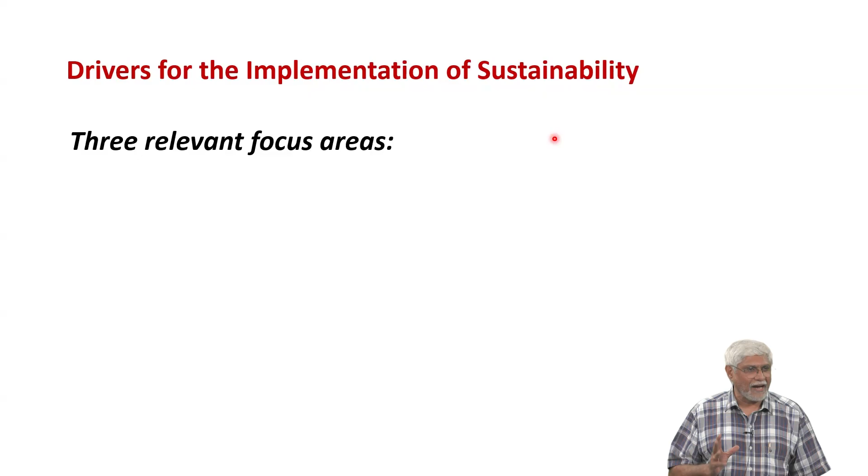Basically, we have to bring in sustainability in three aspects. Generally, what is sustainability? Can someone give me a nice definition? I'll give you my definition, but give me a definition, since everybody likes sustainability and probably you've been told that prefabrication is good for sustainability. Yeah, what is sustainability?

It should be long lasting. Not always, no, but I think it should be long lasting. Environment negatively, okay. Should be eco-friendly, also same thing, no? Eco-friendly and environment. Anything else? Reduction in carbon footprint. Use of minimum resources - raw material consumption should be okay, good.

Should be cost effective, okay. It should be easy to recycle, okay. What else do you think should be in sustainability?

Anybody else? Any architects here? No, no architects. One architect. So architect's point of view, anybody who is architect? Yeah, Vidya. So both of you should tell architect's point of view, what do you think is sustainable?

Minimum energy consumption in the fabrication, in the operation. The operation energy should be low. Good. Climate responsive means what? That it should adapt to climate change. Is that it, or? So it should be, so if it's sustainable, it should be in the climate context, it should also be sustainable. Yeah, very good.

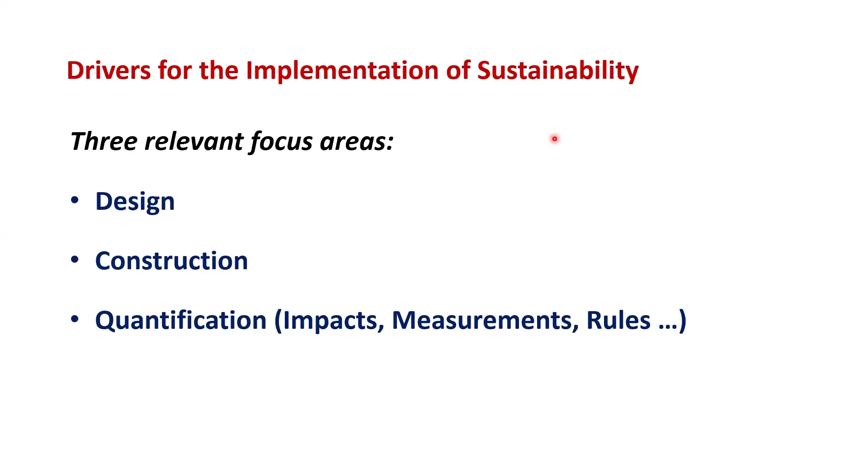Whatever you do, the same thing applies to prefabrication. We cannot jump in at some point and say this is good or this is bad. We have to first start with design, design efficiently, construct efficiently, and quantify whether something is good or not. We have problems of all types, experience on our campus and others with prefabrication. We think it's sustainable, but we've had problems in all these aspects.

Generally, what we say are the advantages and why it is more sustainable: you can construct faster, there will be lower dependence on labor. Now, we might say dependence on labor is good because it is cheaper and gives livelihood, but it also induces a lot of errors, since you depend on skilled or unskilled laborers. So this also has consequences - your factors of safety increase, your tolerances increase, your overheads increase.

Quality is always an issue, like you people said about sustainability. The defects matter, and if we do not look at it, we won't get 50 years, we won't get 100 years - there are buildings collapsing in a few years. So we have to look at better quality, and this is very difficult, because how do you know if something is of good quality or not? Especially in concrete, it's very, very difficult.

We feel quality will be better because the precast elements, the prefabrication, is made in a factory, so it's becoming more of a factory product rather than done at the site. But mostly you will find that something still has to be done at the site. So from all the lectures you've seen, what are things that you have to do at site anyway, even if the element is prefabricated?

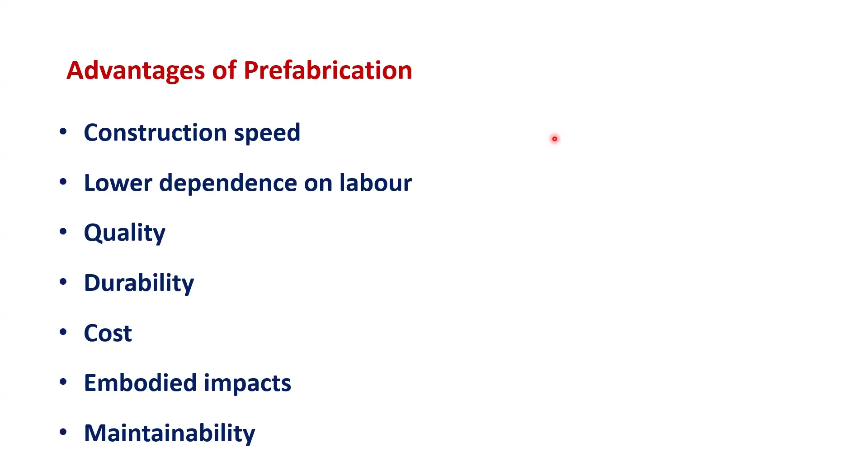So a lot in buildings - that is part of the main scope of this course.

Lot of options are there. This is from 2017, one of the big buildings by a major contractor called Shapoorji Pallonji.

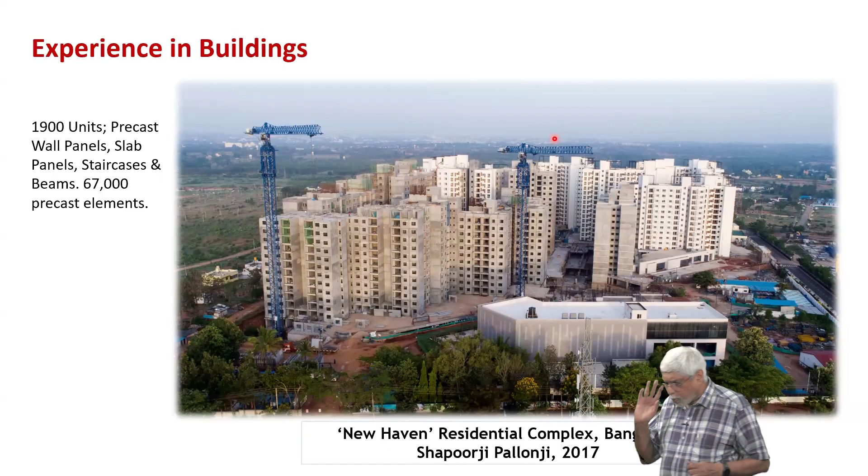So they have used, this is a project where 1,900 units, precast walls, panels, slabs, staircases, beams, 67,000 precast elements. So one thing we start noticing when we look at these success stories is the project has to be big, it has to have a lot of space. Especially in a country like India, and probably many other countries, this is going to be the factor that tells us if it's going to be successful or not. You have to have a large project.

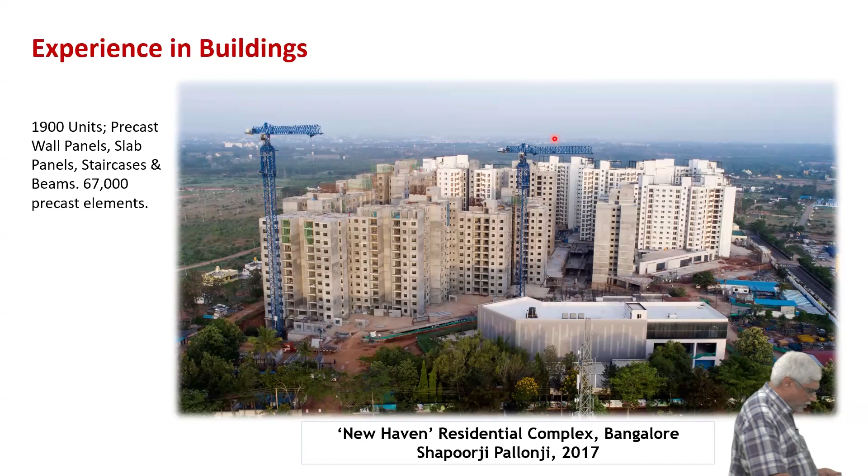Similarly, these are projects for lower middle income groups for CIDCO in Mumbai. And again, a lot of elements. Here you can see some pods also, right in the middle. So these are not only 1 or 2 dimensional, but now you have 3 dimensional elements. These are toilet pods, or these could be smaller elements.

Then you have walls which are very long, about 15 meters or something like that. And finally, if it's done, it looks no different from any other building. The interiors also are very nice. Here you cannot see it very well, but all this is prefabricated. There is even a window sill of granite, and then you have this element which nicely integrates the window and so on. So you can have elements that can be prefabricated, picked up, and put in place.

You might have noticed in some hotels, if you stayed in large hotels like Ibis, or I don't know if Ginger also, the toilet is completely prefabricated. It will usually be polymer, it will look plastic, if you hit it, it sounds plastic. And everything is integrated. When it comes into the building, the sanitary ware is all fitted. You have your WC there, your sink there, lamps, everything is put in. They just fix it, and then you need 3 connections out: water, sewage, and electricity. That is the power of prefabrication. But you have to have a lot of volume. So this is very, very important.

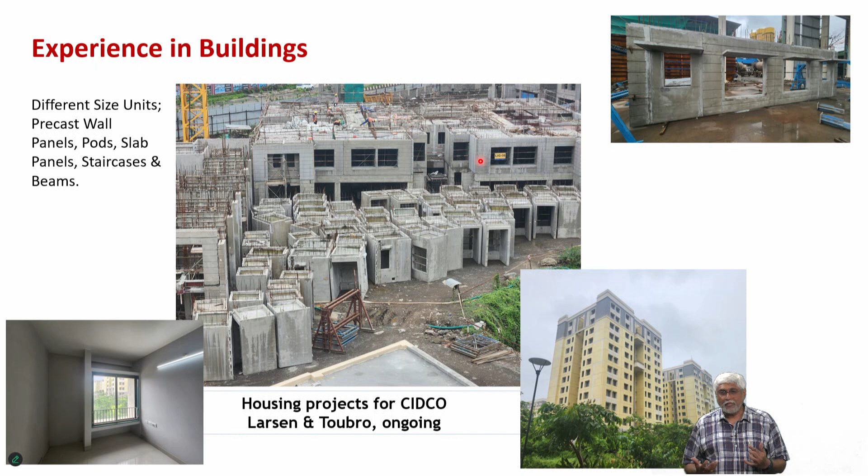So what I think, from what I've discussed today, there are certain things we have to focus on in India. It is not the structural design, that can be done, it's like what we design always for. First of all, if you want to do precast, I think it has to be a large project. Talking to people, it looks like it has to be at least 4 million square feet.

So that means it's a 1,000 crore project. You cannot decide my house should be prefabricated and start it, it won't work. We have burnt our fingers trying to do one small lab. It will take a lot of time, it's not going to happen.

Why do we need such a large project? Number of repetitions will bring down cost. Otherwise, it's a huge investment. What else?

Reuse of molds - how many times do you think we can reuse a metal mold? Has somebody talked to you about it, or should you know? It will be only about 70 to 100 max. Steel molds, only about 70 to 100 max if you're doing this.

So we think it will be a lot, at least this is what they told me at the site. I don't know who told you 1,500 times. Don't believe all these handbooks, they are written by people who don't know anything. Yeah, they are recording this, I don't know if I should say all this. Go to site, talk to people from the site, talk to people from the site.

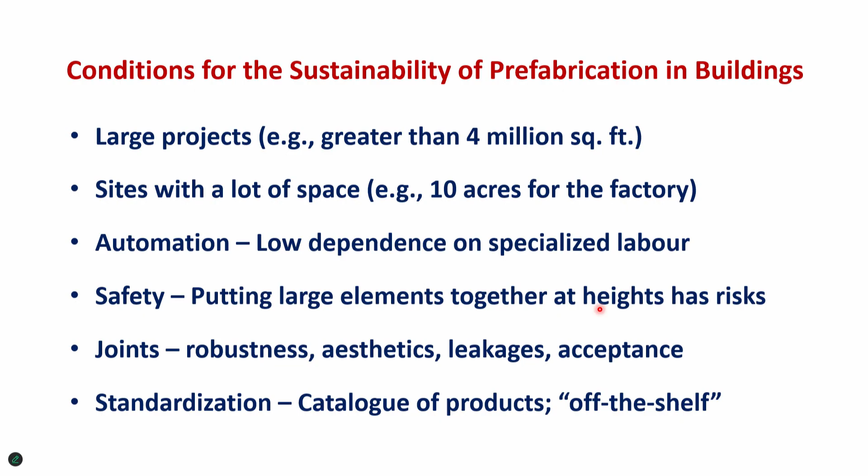The idea was that you want something to last — like somebody said, the hostel should last 100 years. Seems to be a good approach. But do I need to be sure that building will last and be used as the hostel for 100 years? I don't know. If you look at our oldest building on campus — those from campus should know — BSB, right?

Building Sciences Block is our oldest building. It was used as the rectorate or directorate, it was used as the library, it was used as all our offices. I don't know if it had labs or not. But now you have all sorts of things in BSB.

So if I build a hostel or an administrative building that is supposed to last 100 years, I don't know whether I'll use it for 100 years. Will I even have so many students in 100 years? Not sure. So the concept came about: can we make the shell of the building last 100 years, but the interior need not last so long? That sounds obvious, no? Why should my paint last 100 years? Why should my doors last 100 years? So can it be different?

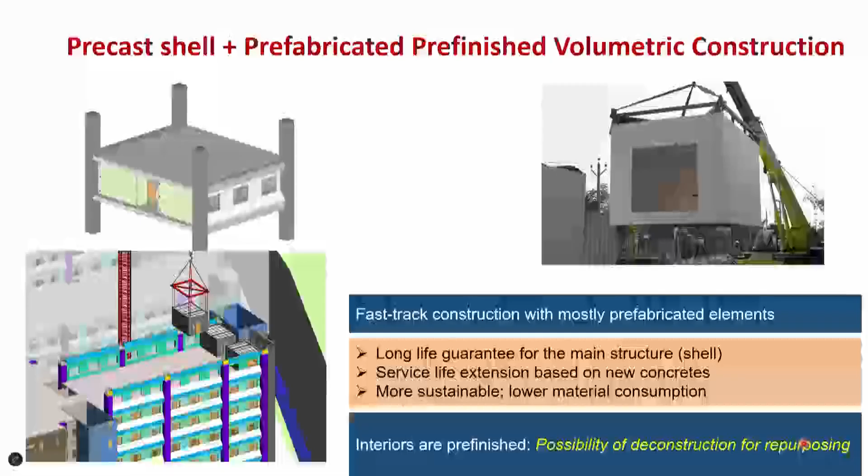Okay, so this is the idea: we want institutional buildings where the shell is designed for long term durability, 100 years, but the interior is empty. We fill it up with rooms that can be dismantled without touching my structural wall or my structural system. The structural system is stable without the interiors, so stability is not affected, durability is not affected. I just do this, and when I don't want it, I just collapse them, remove them.

In Japan, what they do is they actually take the wall, take the room out. We thought that will be too expensive for us to do, because you will have to have a dismantleable wall as well. So we are looking at the possibility of just collapsing, just removing some bolts, and you can remove the room. So this is one of the concepts that we'll see how it goes. This is actually a picture from our panel. We'll see how it goes.

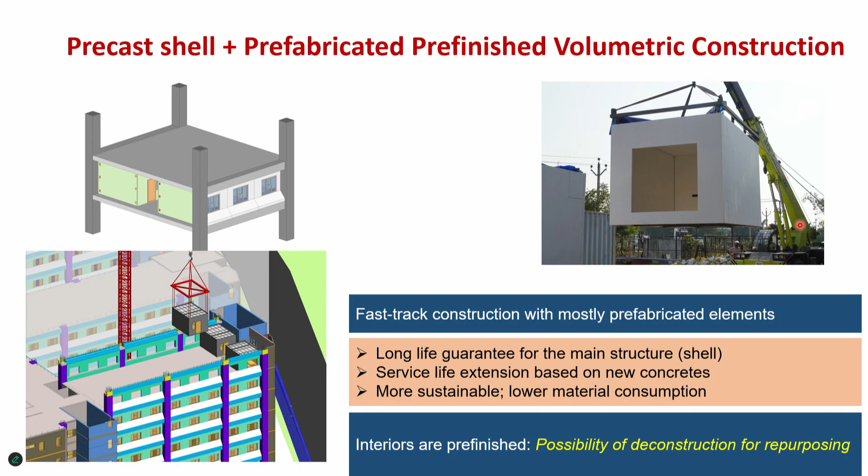So these are some ideas that I think are interesting to have when we are talking prefabrication of buildings. What are the issues? What are the problems that we have with materials? For concrete, we need very early strength. Did anybody tell you what is the strength requirement of concrete normally in prefabrication? 15 megapascal in 15 hours. Okay, so that's difficult. That's difficult without steam curing.

Why don't we want to do steam curing? Cost. Yeah, we want everything cheap, but we want it to last 100 years, right? So this is a problem. We don't want to do steam curing, but we want 15 megapascal. So what does that rule out? What can I not use now, because I need this 15 megapascal in 15 hours?

I cannot use fly ash. I cannot use GGBS. I cannot use LC3, which we told you in some other place is the most sustainable thing. You cannot do it. So this is again a big problem. Even if you want to pay for it, the builder cannot use it. So this is a big challenge.

Okay, so we have to work on it. This is actually an interesting research problem, but this is a real problem. When you go to a builder and say, why can't you use fly ash, they tell you I will have to leave the element in the mold for 3 days, 4 days. And that brings up the cost, slows down your project. Your factory size has to now become 3 times bigger, 4 times bigger. All this is cost. Sustainability has to be for all, for everyone, and it's difficult. It's easy to talk about saying put fly ash, my concrete is sustainable, my structure is sustainable. Sometimes it cannot be done.

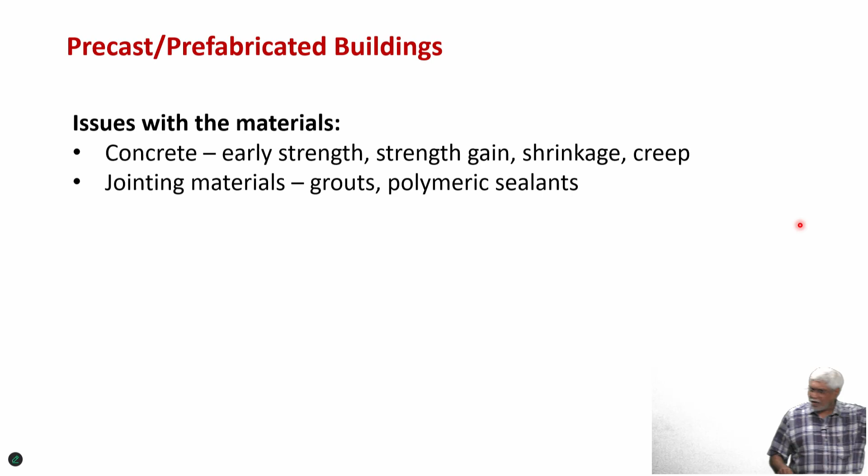They don't, because the structural designer is sitting in the AC office and he has put M50 on the design drawing. But this other guy is facing problems from the lifting guy. The lifting guy is saying, I want 15 megapascal in 15 hours. Now this is another party. This guy says, how can I build? I'm the construction manager, you have to give me 15 megapascal in 15 hours. So the poor concrete guy now designs M75, otherwise he cannot give you that M15. So there are 3 different parties who don't talk to each other in prefabrication, which creates a huge problem. There is the structural designer who is using the code, no fault of them, they are doing it properly.

They are looking at 28 days strength, 28 days shrinkage, all this. But the guy who is lifting and placing has to do it in 3 days, in 7 days. He is not worried about 28 days. He is sure the thing will not collapse, but he has to put it in 3 days. When you talk to people at the site, 15 hours it comes out of the mold.

3 hours it has to be in the site. 3 days it has to be in the site. At 3 days it has to be in the site. And after that, strength is going up, shrinkage is going up, creep is going up.

So these are the problems that we'll have to understand. Shrinkage and creep are becoming serious problems. We are seeing joints opening, we are seeing cracks, and this is something that we have to look at. Designing on 28-day values is not right when we are doing prefabrication. We have to design on actual ages of when it is done.

The other thing is jointing materials. We generally don't know much about jointing materials. As civil engineers, as structural engineers, we don't know much. We leave it to other people. They do whatever they want, and then there is a problem which will cause leakages and durability issues. So these are two things in terms of materials that I would like to highlight.

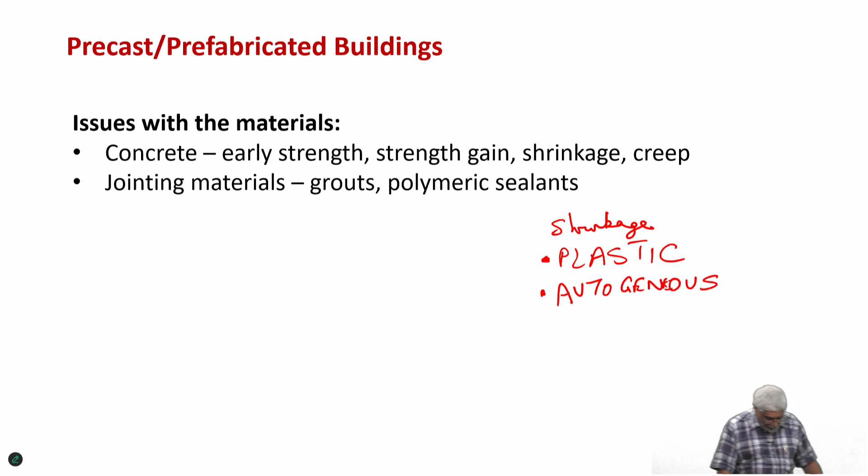So what is thermal shrinkage? Thermal shrinkage happens because temperature of concrete goes up while setting. All the reactions that cement and water have are exothermic, right? It gives out heat. If you ever touch concrete after a few hours or the next day, you'll find it's hot, because temperature has gone up while setting, and then it has to cool down, because everything cools down to ambient, and when everything cools down, it contracts. So there is shrinkage - that can also cause cracking.

So thermal shrinkage cracks, when will they appear? Suppose you're a consultant and somebody calls you and says there are cracks in my diaphragm wall or slab - first thing you should ask is what? When did you see the crack? Half your money you earn that way - just with this question, half your consultancy fee you've already earned.

If they say, soon as we cast, we just went for lunch and came back - plastic shrinkage. 1 week time, I demolded, diaphragm wall is all cracks - you ask when? Thermal shrinkage. You will see that it's every 3 meters. You ask them also, appear very intelligent - you say, should be 2 or 3 meters, no? They say yes. Full consultancy fee paid - you have not even gone to the site.

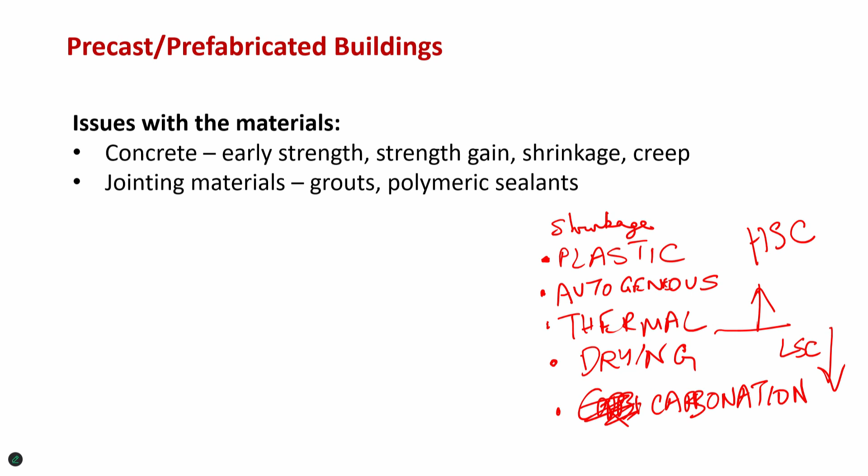Yes, in the joints. So what is not shrinking? The grout is not shrinking, but the concrete doesn't know that. You didn't tell the concrete that it should not shrink. No, the poor thing will continue to shrink.

So I have a joint, and another precast element, and here you put the grout. The grout is non-shrink, but this thing is going to shrink. So this will open. So what will happen? It will crack.

Yeah, go and see it after one year. So how to mitigate? Do the jointing late. Your wet joint should be done not in the beginning, but after a lot of time. Best thing is to get an idea of how this concrete is going to shrink. Concrete shrinks and then afterwards it stabilizes. After that, you get very little shrinkage. So let the joint open, and then you do your grout.

Then you do your sealing. Not at 3 days, not at 7 days. Then for sure it has to open. How can concrete not shrink? It will shrink. So this understanding is needed. Don't finish your joints very early. Do your joints last. Then that will work.

Does it solve or cause more problems? More problems. I know, I know, I know.

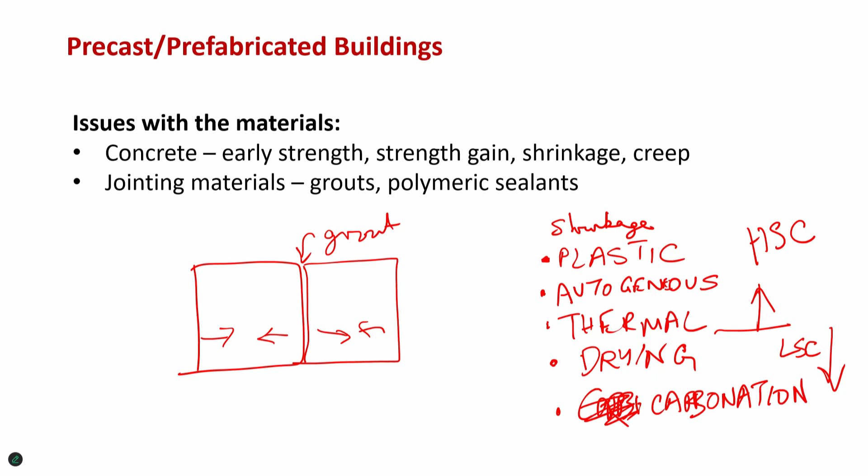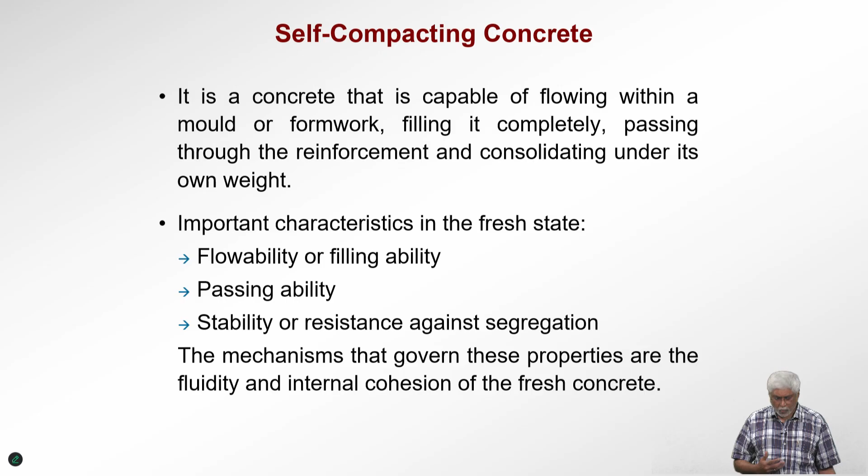Self-compacting concrete is a good thing to do, if you have prefabrication, or even regular concrete, because it takes away the person factor, the laborer factor, the worker factor, and you get some hold on quality. So I'll tell you how these tests are done.

Let me, you can ask me questions meanwhile, while I put the USB drive in. Yeah.

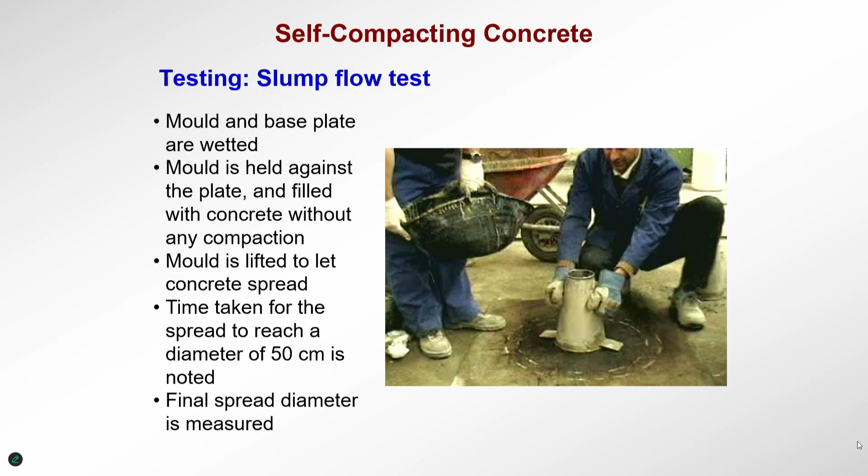Oh, you had slump flow, you did? Okay. Then tell me about slump flow - if you know about it, you tell me. How is the slump flow test done? Quickly. Justin says all of you know about this test, so you must tell me instead of me telling you. What is 700 mm? So how do we do the test? Quickly.

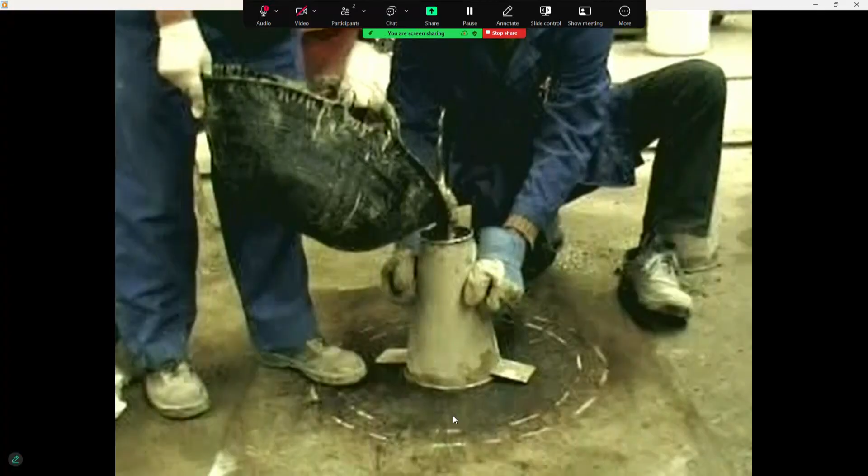Okay, so this is how we do the slump test. I don't know what Justin showed you, but you take the regular slump Abrams cone, put it on a plate. You have to mark first 50 centimeters, then mark your target diameter. Generally, if it's a column, it need not be very high - the slump can even be 600mm, it will still work. If it's a slab, maybe you need 700mm. So we don't have to go overboard.

So you fill it, lift it up. Two things have to be measured: the time taken for the 50 centimeter diameter to be reached, and the final spread. So what's been pointed out is the 50 centimeter diameter, and somebody with a stopwatch is looking at it. This is very good for precast because you don't have to worry about exactly the vibration and all that stuff. It works very, very nicely.

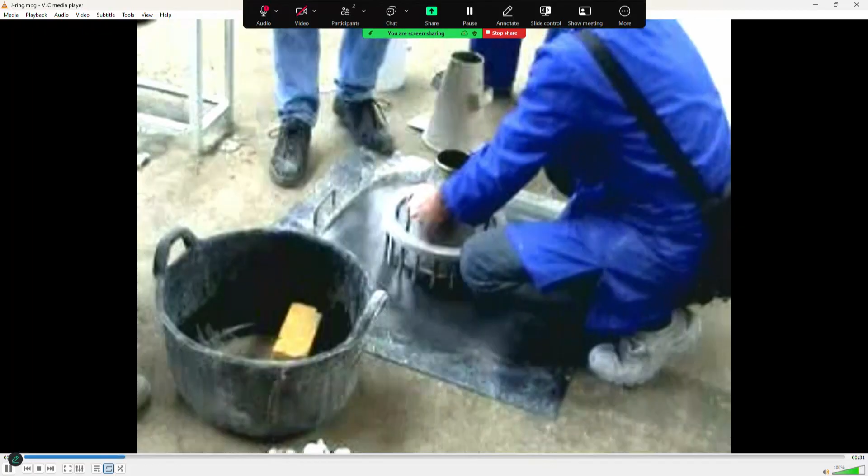Then the other test which Justin showed you is the J ring, which is the same as the slump flow, but we do it with a ring of reinforcement to see if the concrete gets blocked by the reinforcement. You can take a standard reinforcement spacing, or whatever is the worst case in your element. So we do it and we see.

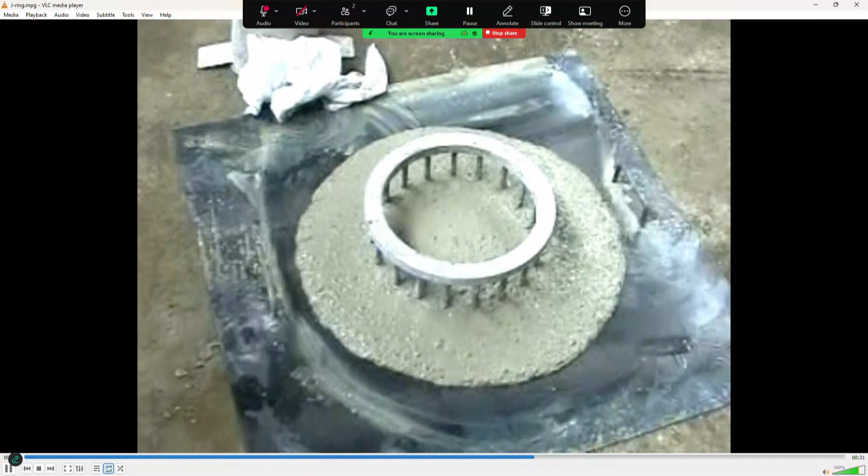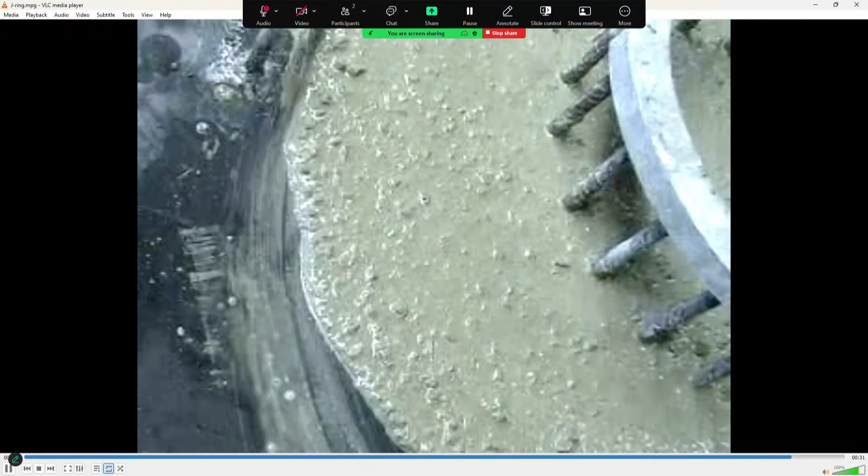Now we compare the slump flow test diameter with this, and if it's very different - more than 50mm difference - then we reject it. That means it's blocking. So these are tests that unfortunately have no easy single test to do. We have to do this, and each of these has a purpose.

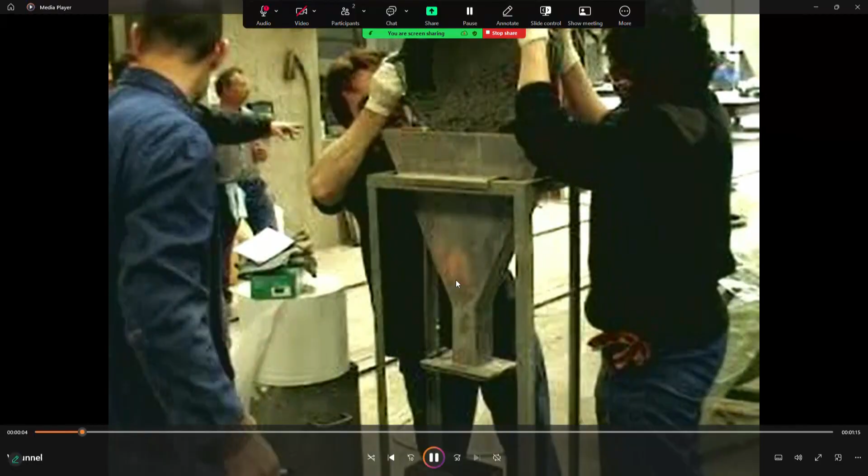Okay, then somebody mentioned V funnel. So the V funnel test is good for pumping. In prefabrication it may not be very important that way, but for segregation it's very important. So we do this test 2 times.

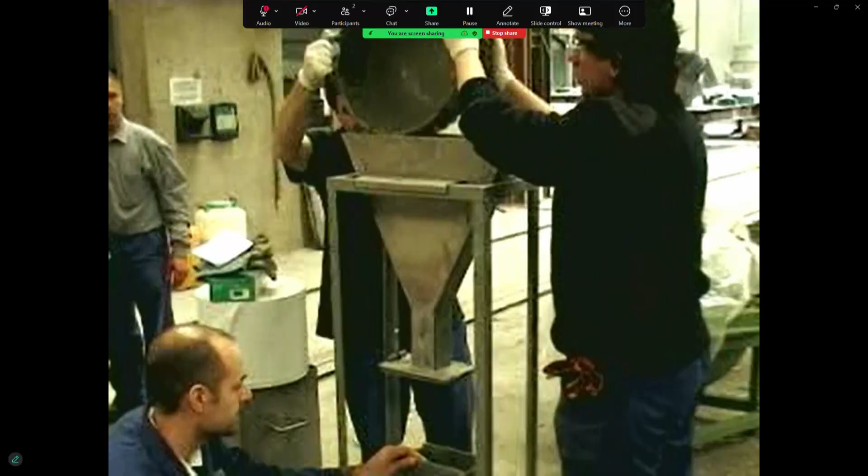We fill this funnel, measure the time taken for concrete to go through, then do it again, but this time you let it sit there for 5 minutes. So what happens in this 5 minutes, if it's a bad concrete, it starts to settle down and it will block the concrete from coming out. Comparing the 2 times, it should not be more than about 3 seconds, then you know that this concrete is not segregated. So these are tests that we generally do.

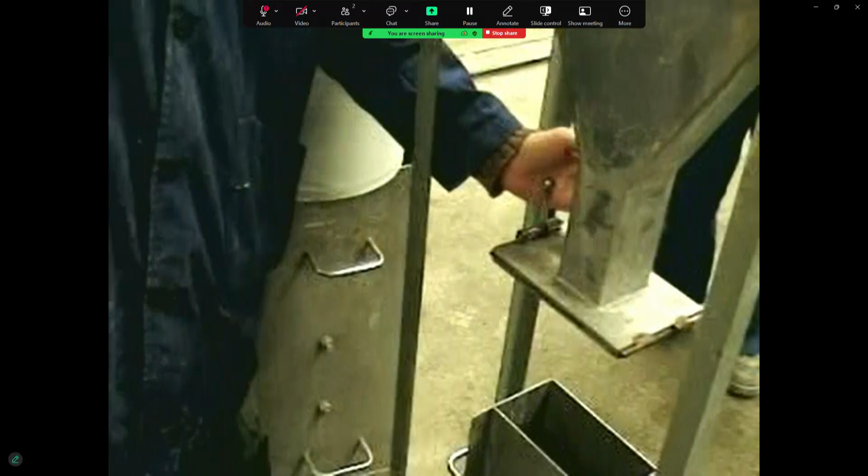So self-compacting concrete is a good concrete, but you have to do some things like this in order to see how beneficial it is.

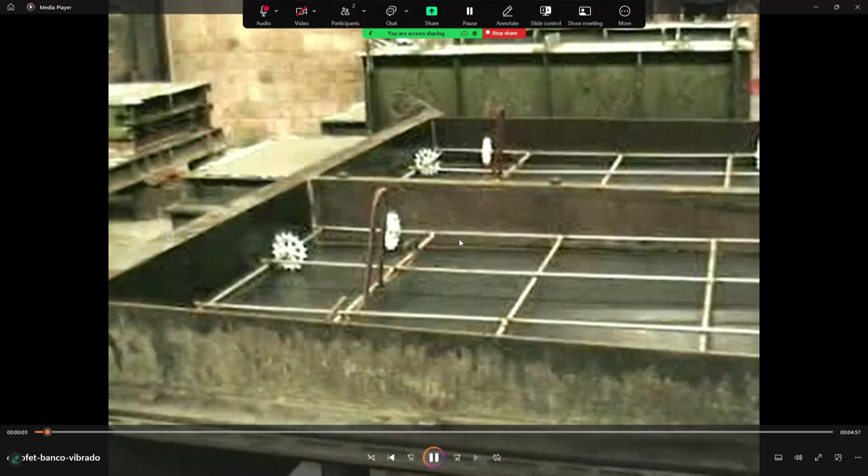Okay, now let me show you one of my first experiences with prefabrication and self-compacting concrete. This is all real stories. This is in a factory. If anybody has gone to a prefabrication plant, you will see a lot of metal molds.

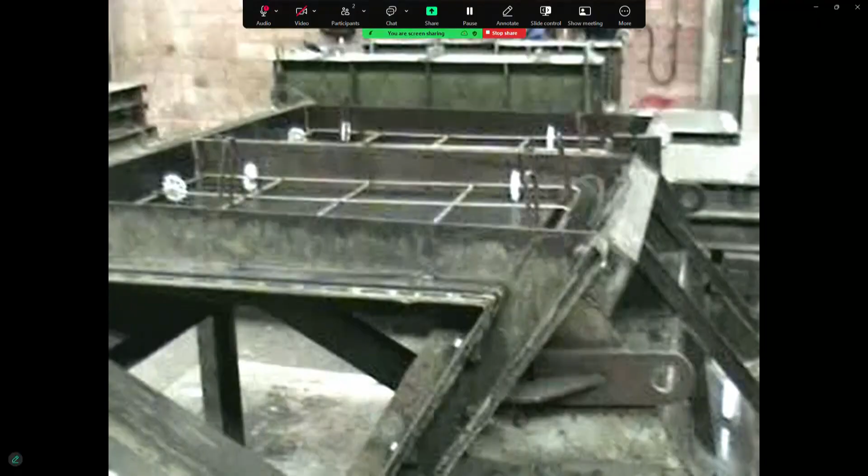Like somebody said, Umesh, yeah? What is your name? I forgot your name. Soham said that sometimes the mold lasts a lot of time. So this type of mold, yes, it will last for 100, 200 times. When it's in a factory, you're doing it very, very carefully, then it will last for a long time. But on the site, generally not that much.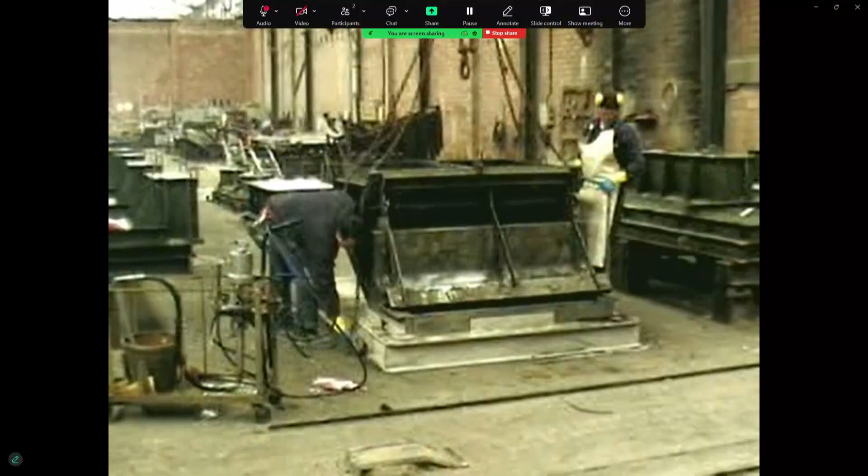So here what they are doing is making something like a bench, and like the benches that you see on our campus, you will see a lot of concrete benches around - so the inspiration is from here. This is a major company in Spain, Escofet, and I was working there, so I got this opportunity.

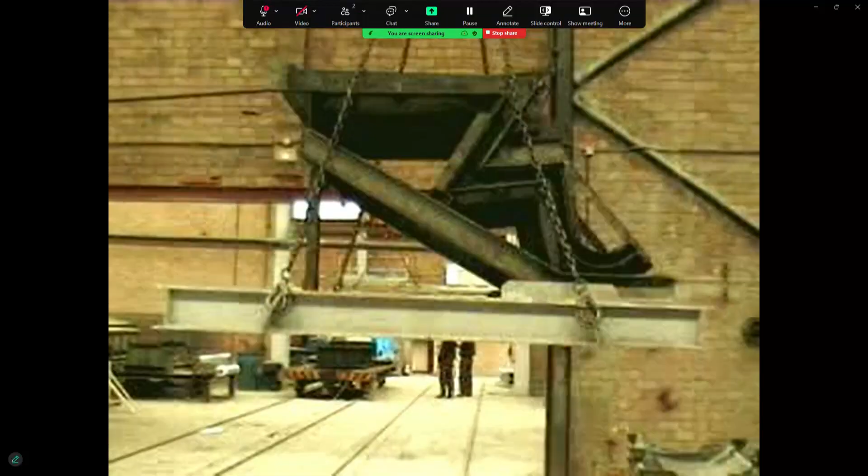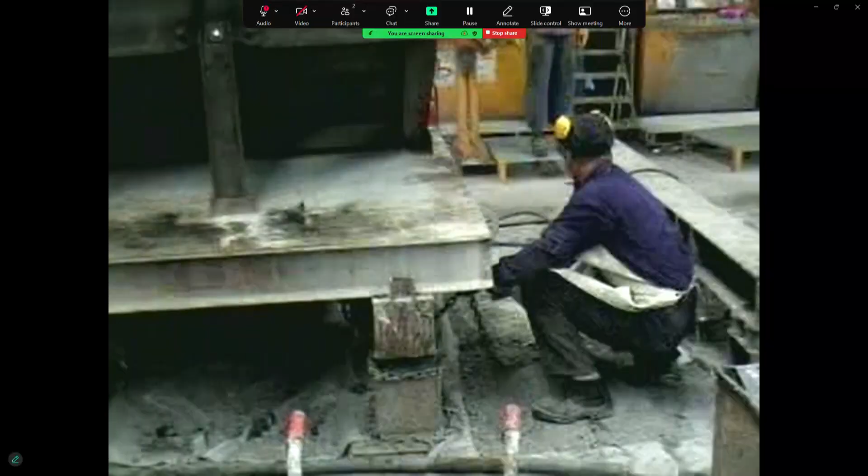You can see the operations involved for making a vibrated prefabricated element. They have to put the mold on top of this metal frame, lift it and put it on a vibrating table. So this whole thing vibrates, and the concrete has to go through it and fill in. It's a lot of vibration, and generally the worker is standing on the vibrating table, so the worker is undergoing the same vibration as the concrete, but hundreds of times in his life.

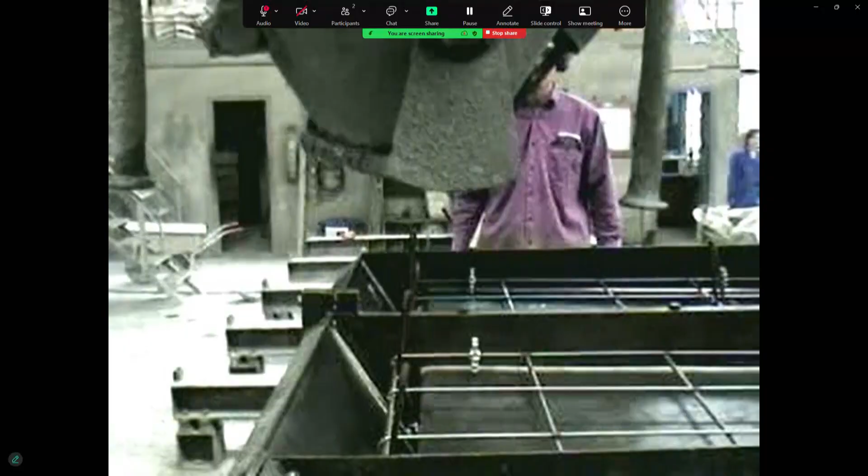So they get a lot of health problems - migraines, and something called white fingers, where blood stops flowing into the fingers because they're always vibrating. This is a huge problem. So there is a huge motivation in construction to move away from vibrated concrete, because this vibration is harmful for you. Concrete gets only vibrated once in its life, but the worker gets vibrated a lot. So it's a very difficult thing, and there's a lot of noise too - you'll see that all of them have earmuffs.

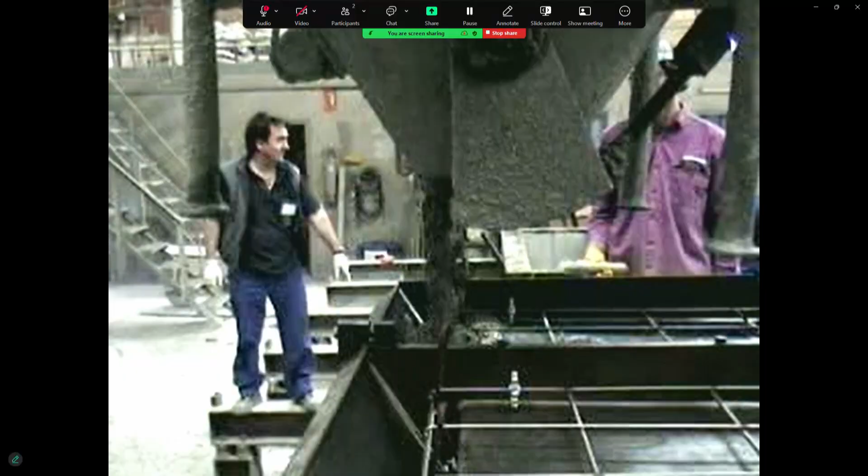So this is 2004. We went to this factory and said, can you give us an opportunity to try out self-compacting concrete? They said, okay, you do one with regular vibrated and one with self-compacting - let our workers also see the difference.

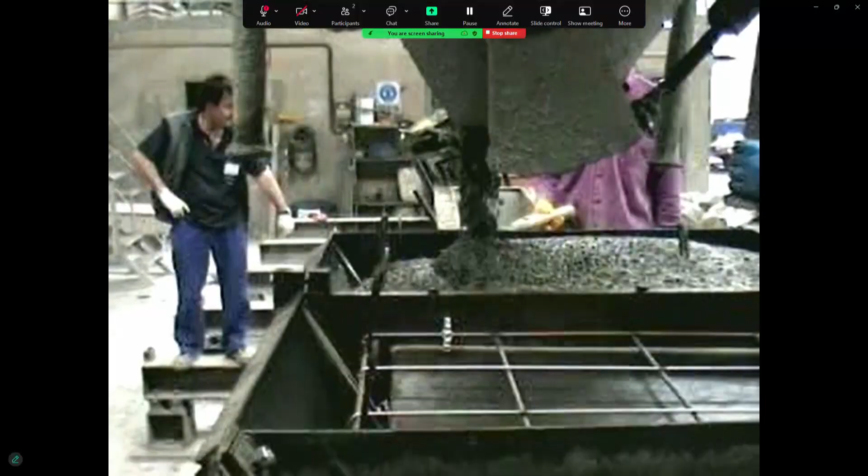So this, what you are seeing, is vibrated concrete. Concrete is put there, then - I'm cutting out the sound, but the vibration has started now. You see that it's flattening out, and the concrete is going through the side, and you will see the vibration of the reinforcement bar on this side.

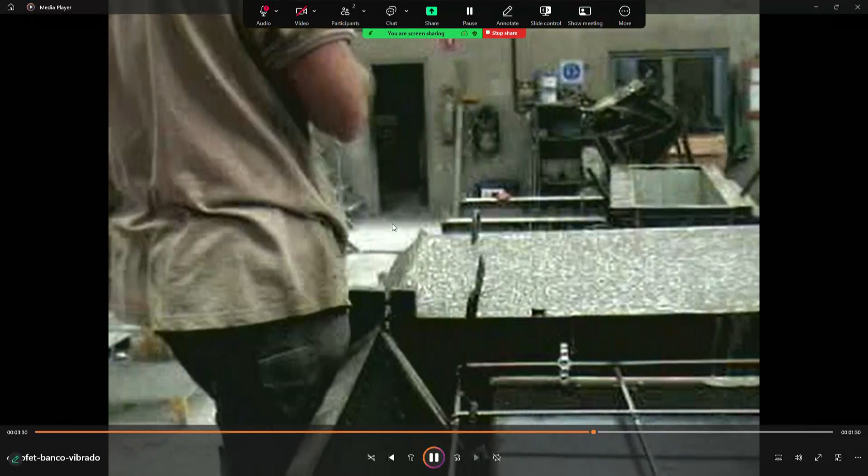That is not enough sometimes. So what happens is somebody will climb on top with a needle vibrator, pushing the concrete through. This is somebody standing on the vibrating table with the needle vibrator, pushing the concrete through. You can imagine how much effort and strain these people have. So in prefabrication, there is a lot of noise, vibration, and strain that these workers have to go through.

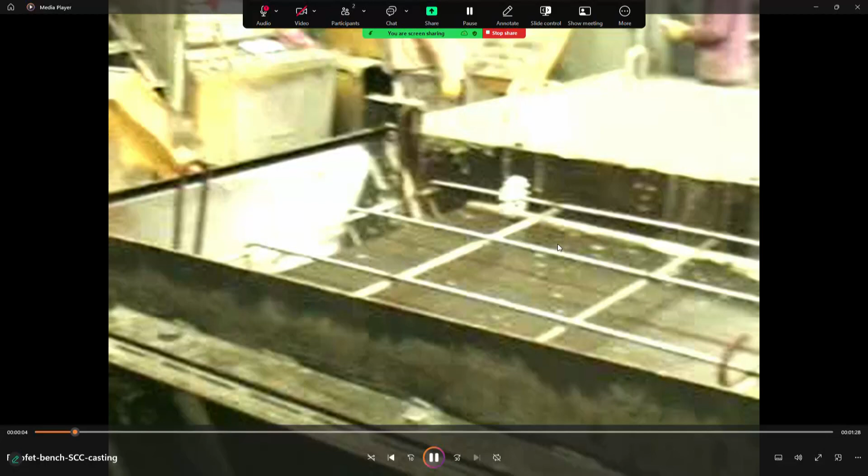Okay, then it's finished up. Now I'll show you the same element with self-compacting concrete. Same day, 20 years back. So this part is now going to be done without any vibration, with self-compacting concrete.

A lot of workers were just curious. They wanted to see this amazing concrete which does not need any vibration, to show you the fact. This guy was in charge of the plant. Afterwards he said, 'This is amazing, we have to go with this concrete.'

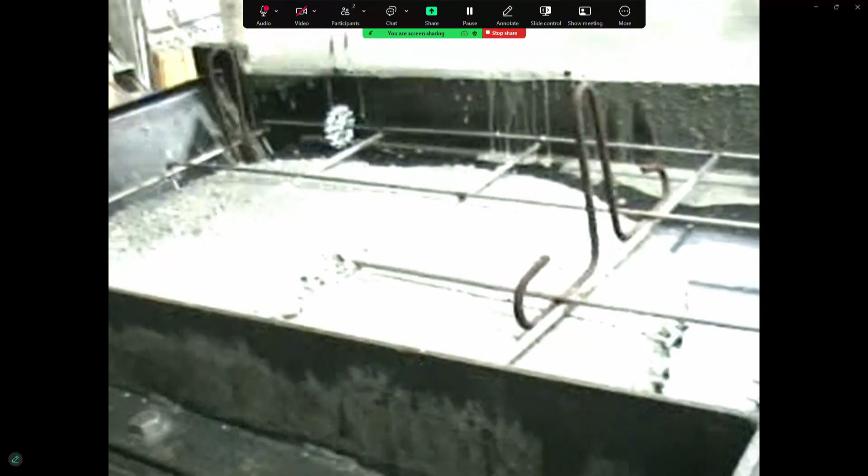I met them again and visited in 2008. 80% of their concrete was all self-compacting. This guy remembered that we had helped them change this concrete. And there was no noise. The factory was quiet, fewer workers, and things were really going well.

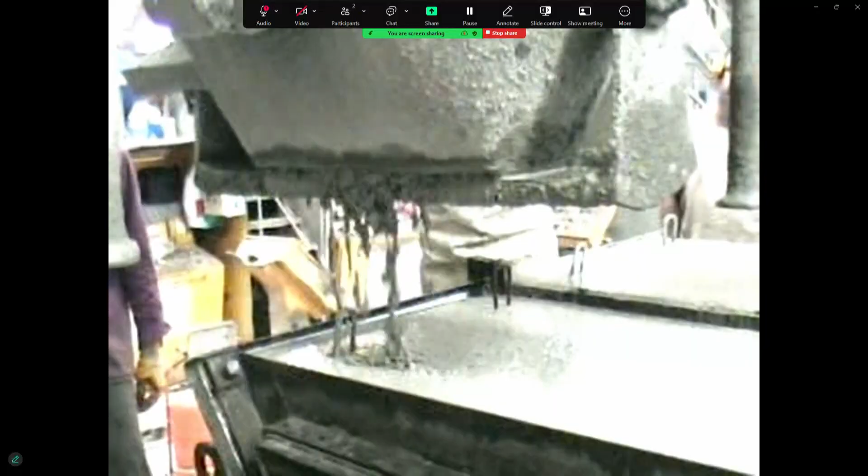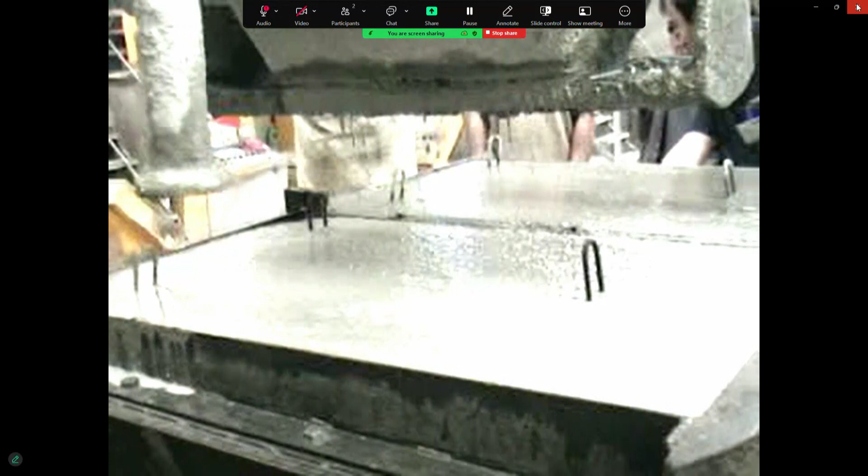See, it's all done. In 3 minutes, the concrete is all poured, whereas the other one took a lot of effort. The factory themselves changed, they believed this is the way to go. In 4 years, their transition went from zero SCC to 80% of their product being SCC. That's the story which really tells there is an advantage to doing this.

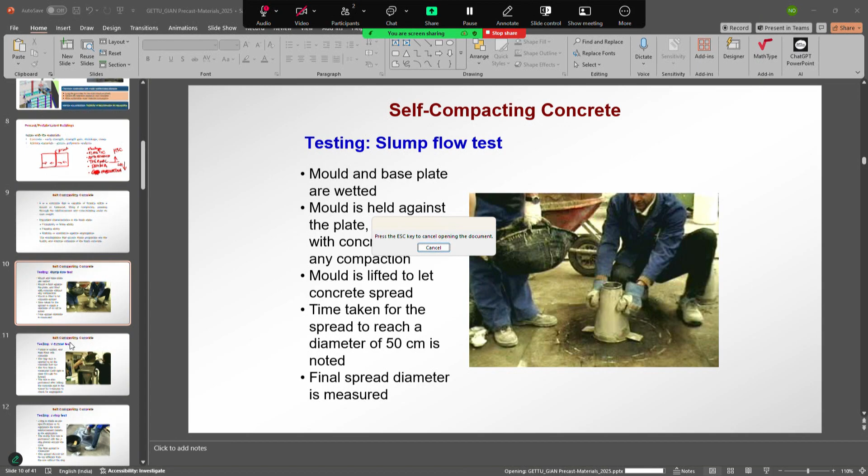So that's self-compacting concrete covered. Any questions on SCC, on self-compacting concrete? You can use it anywhere, but I think in prefabrication there are a lot of advantages, and if we can use it, it's going to be very useful.

Okay, I have 6 minutes. What do you want me to talk about?

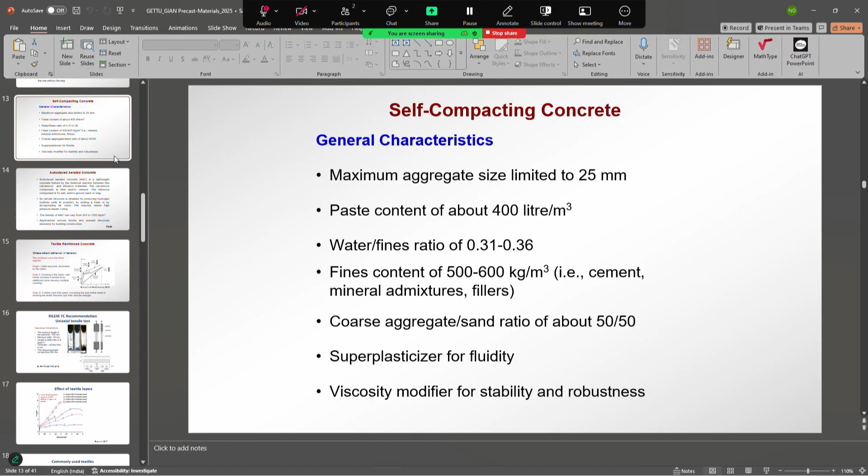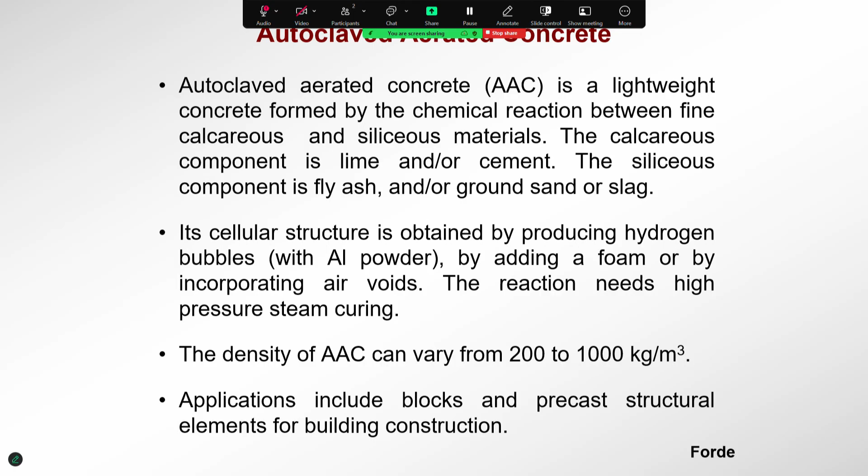Okay, thank you. So, AAC blocks again, precast, we use them a lot. Plastering is very, very important, you lose because of porosity. So textile reinforced concrete, I'll show you because Professor Amlan reminded me, this is a new type of concrete. We are doing it and people are using it on housing also. We just came back from Rajapalayam where somebody is building houses with textile reinforced concrete.

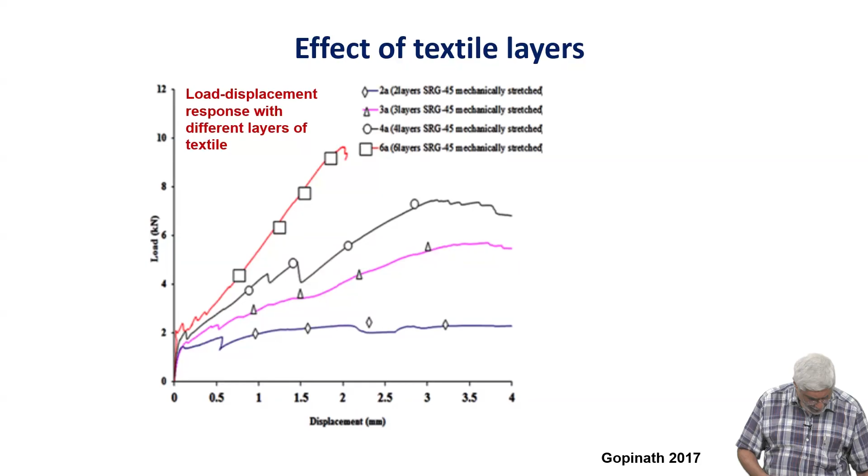So basically it is concrete with this type of behavior, a strain hardening type of behavior. Cracks are happening, but there are multiple cracks, not one single crack in tension. So it's like multiple cracking, and this gives this type of behavior.

And how do you do it? You reinforce it with glass. So what could be advantages and disadvantages of reinforcing with glass instead of metal?

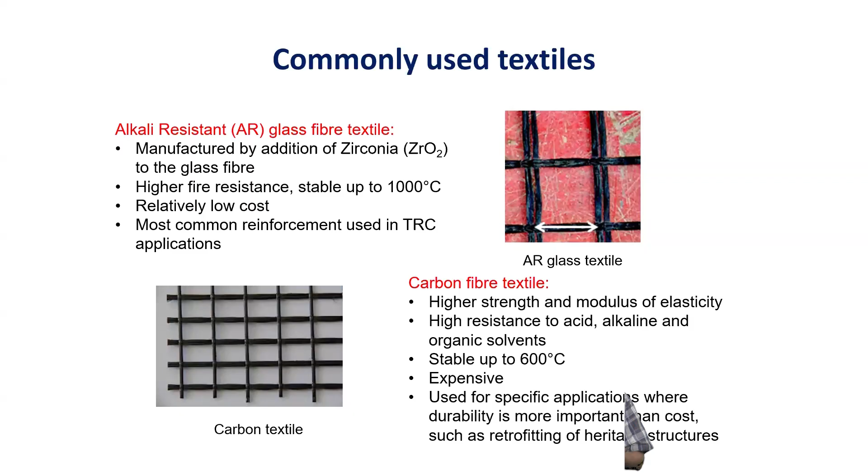One is no corrosion. Have you heard of ferrocement? Some of you might have heard of ferrocement. This was very popular in the 60s and 70s, where we used thin elements to do drop panels, shelves, all these things with metal mesh. The problem was corrosion. Basically it's the same thing, but we are using glass instead. So glass should not corrode, but it also gets attacked by alkalis, so it's a slightly different story, but generally it will not corrode.

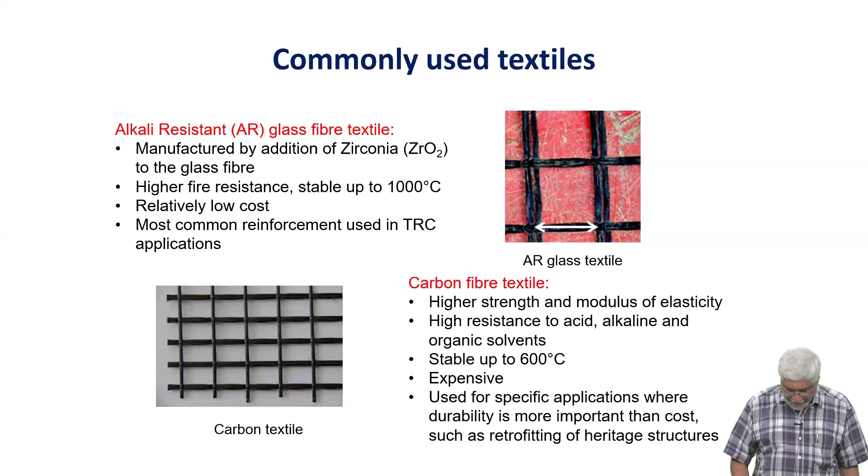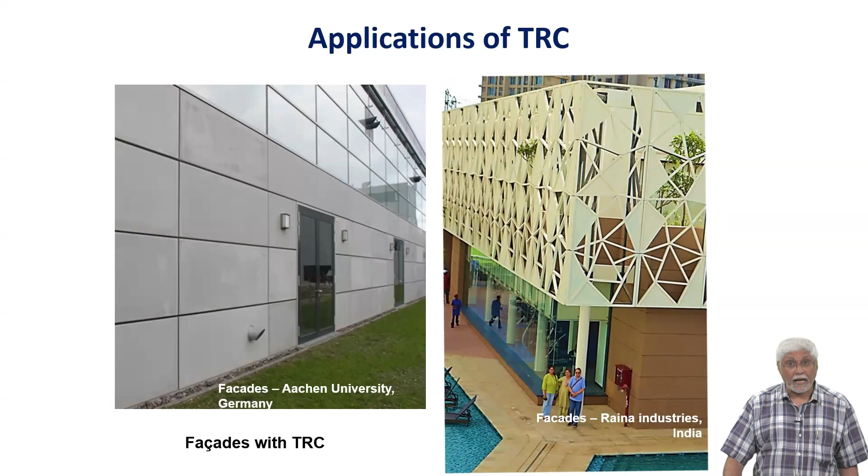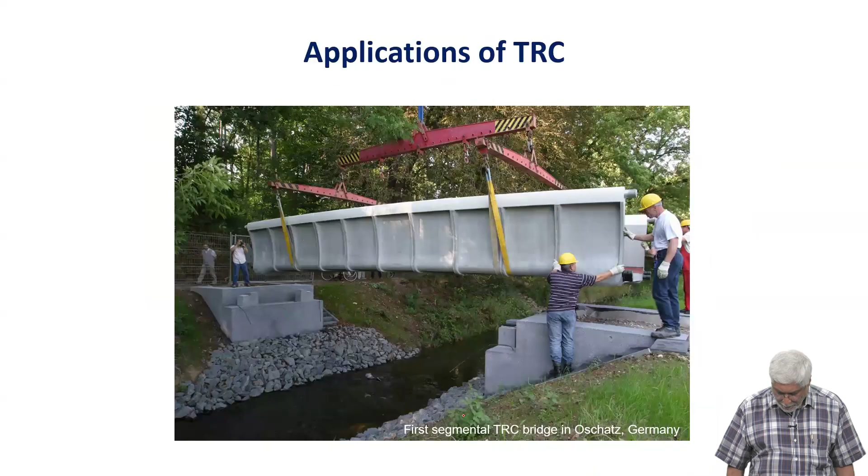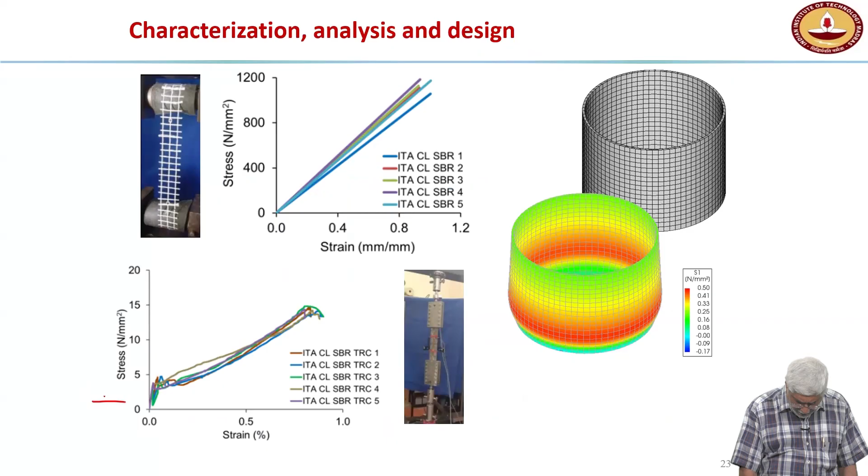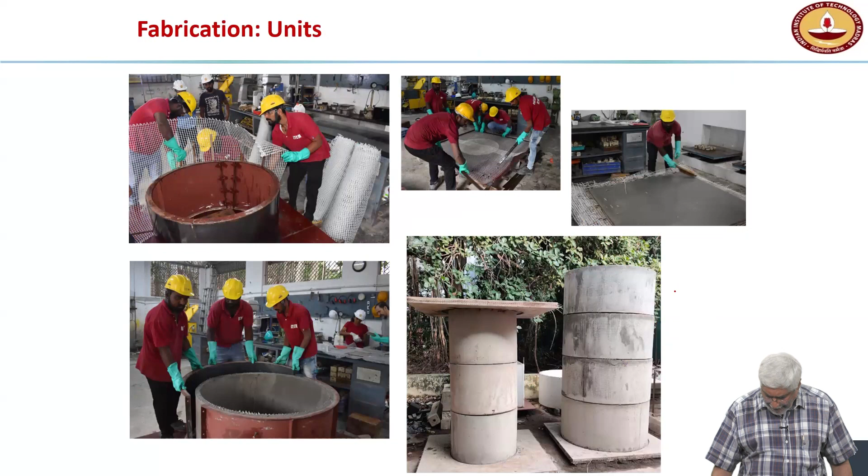We use glass fiber, glass textile, and this is the behavior that we get. We made these ring elements like this. We made a mold, and the textile is put around, and we fabricate the tanks to the height that we require by putting one ring on top of the other. For transportation, instead of making the rings all the same size, we made them different sizes so they can all go inside one another.

Sachin was the one who got this project and did most of the work, so afterwards you can ask him all the questions. So these rings go one inside the other.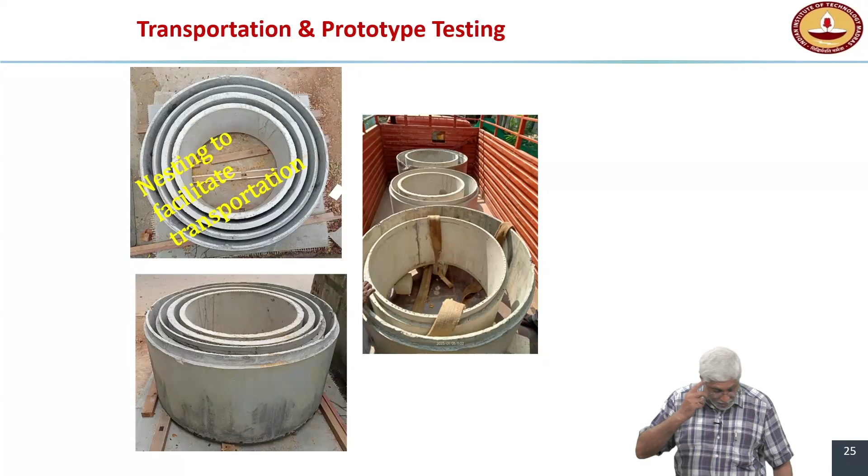For transportation, it becomes very, very easy. And we tested it also by filling it with water to see if this can hold water or not.

Textile reinforcement is also a good way to do thin elements. There are people now doing it for housing also, where they're using it as lost formwork or panels.

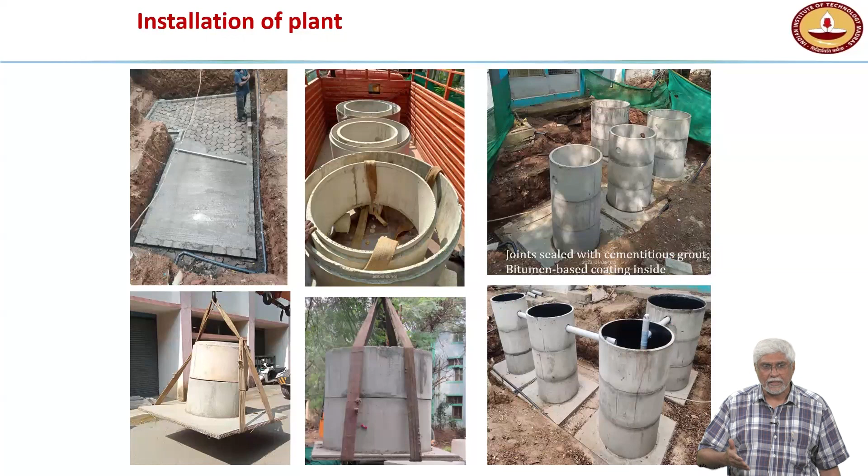So Sifcon has a lot of fibers. It will have a lot of steel fibers. What you do is you take the mold, first you fill it with steel fibers, then you pour the slurry inside to fill it up.

This is used a lot in bank vaults, to protect the bank, to make a bunker. Recently we might have heard that in the war, the US used these bunker busting bombs. One of the reasons was that Iran has been claimed to have something like Sifcon in its bunkers. This came out long back, that UHPC or Sifcon was used by Iran and some other countries to make their bunkers, so they become blast resistant with very heavy reinforcement. You need a lot of energy to break through. That is one reason why they talk about these bunker busting bombs that were used.

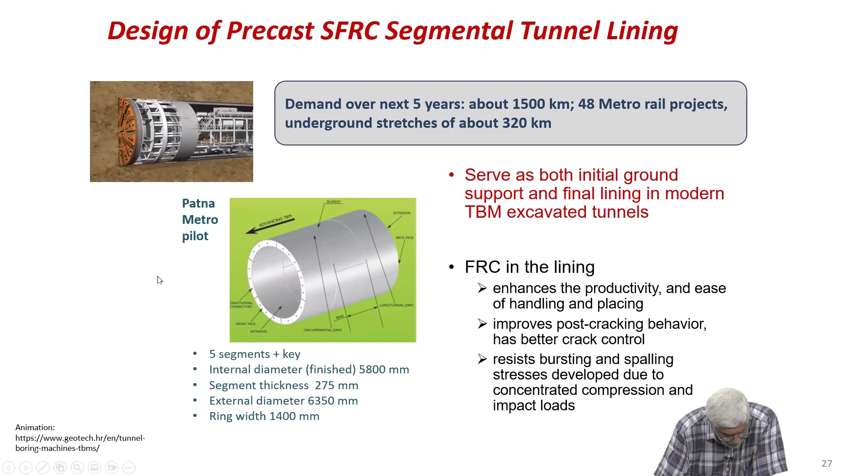Along the axis of the tunnel, then afterwards the soil compresses them, so it changes during its life. A lot of times there, one advantage of fibers is that this could handle it. We have some leads where additionally we put reinforcement, or put fibers.

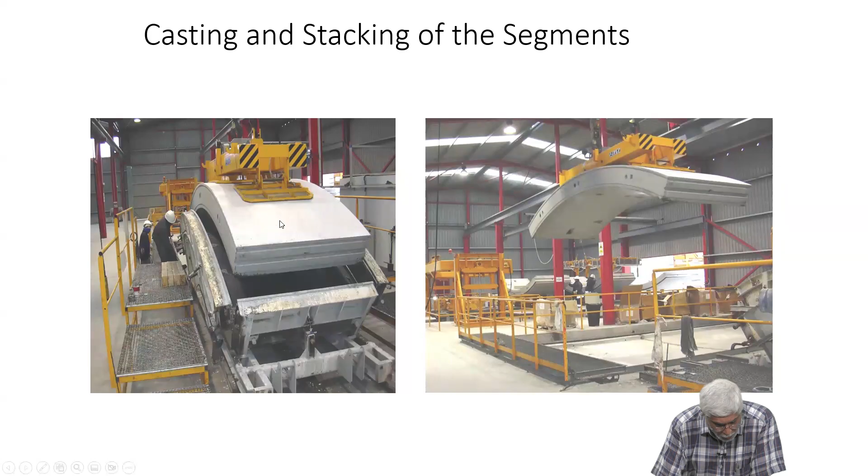So this is the sequence, in case you have not seen this procedure, of how the segment is made. In any of the metros, underground metros in India, the segment is made like this, on an operating table. Then afterward it is steam cured. At very early age, this one will have, okay, 6 to 8 hours it's lifted. Here it has 1 day. Here this is 1 week. And some cracking, so this also has to be checked in the design.

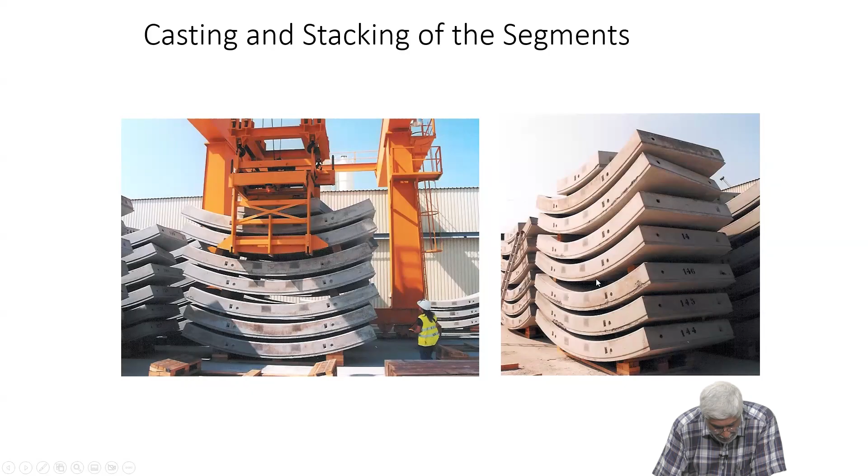Needed for 1 ring. So the whole tunnel, in this case it was 1.8 meters, in a 10.2 meter diameter, the segments.

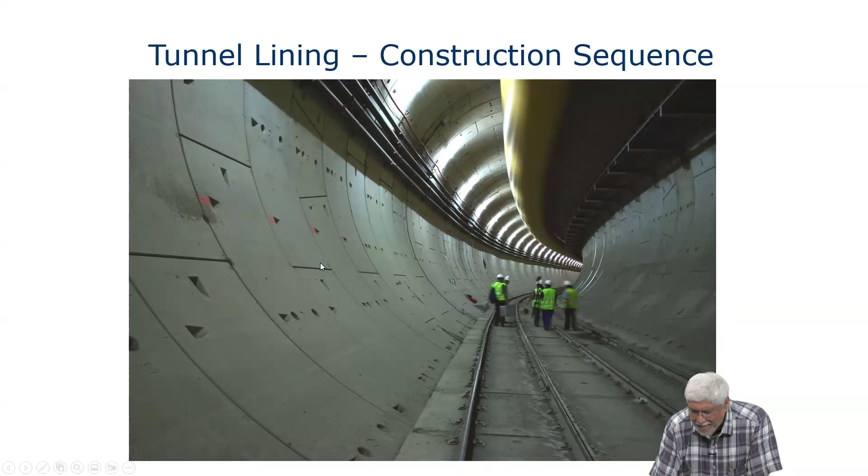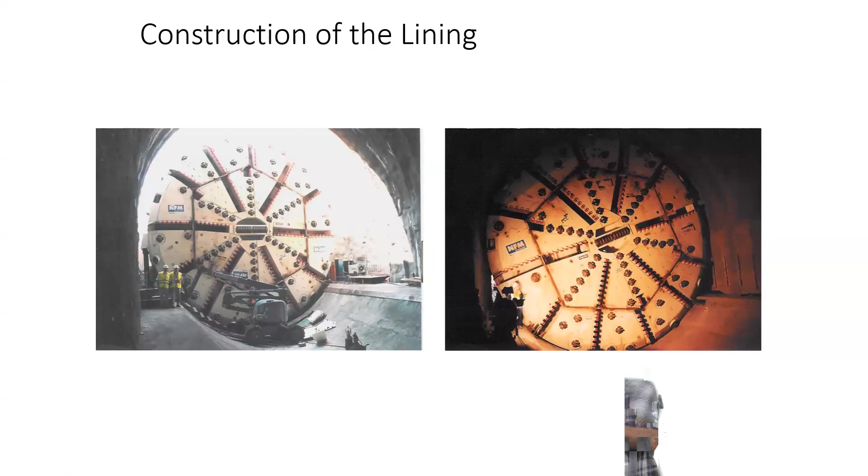Then afterwards the TBM pushes, and for pushing it has to react against something that's already been built. So it goes for say 2 meters, the jacks are withdrawn. Then there is space for 1 ring, that ring is put. Then it moves ring by ring, and that is how your metro tunnels are constructed.

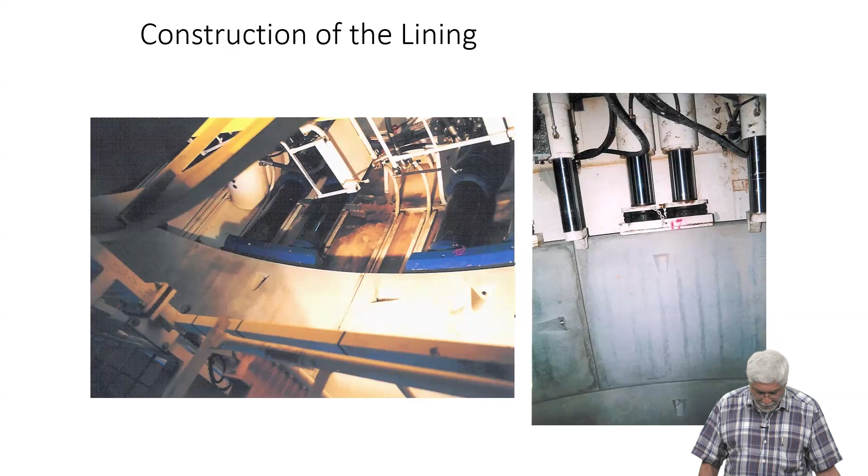Lot of prefabrication, this is the fastest way to do tunneling. In metro tunneling anywhere in the world, now mostly they will be doing it like this. Railway tunnels have started too. In our Rishikesh to Karnaprayag section, a lot of main sections are being done like this. The whole train, the big train, is going to go in tunnels made with segments like this, reinforced concrete and also fiber reinforced concrete in the future. Other countries are doing it and India will get there. This is the robot arm that is placing the segment as the TBM is moving.

We've done some tests, this is in the structures lab, probably when Professor Amlan was HOD. We have done some tests to validate the design.

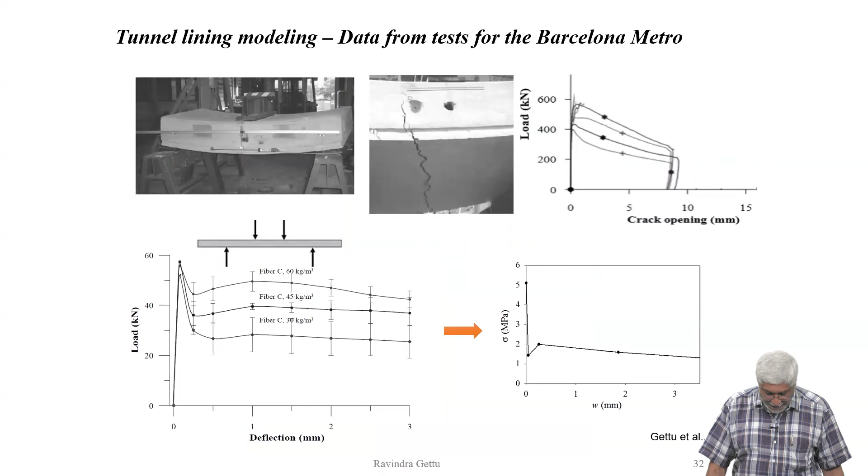These are recent work where we've looked at the Patna metro to see if we can suggest fiber reinforced concrete as an alternative. This is where the jacks come, the jacks apply a lot of force. So the jack applies force here, and we have to see whether it will crack or not.

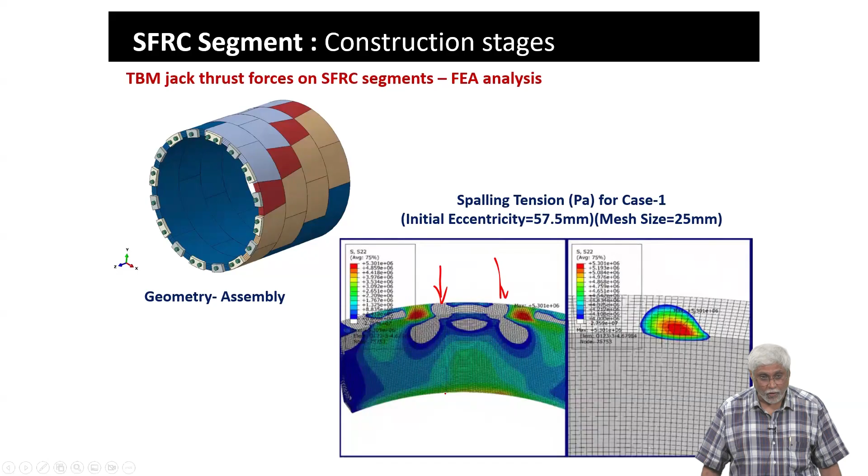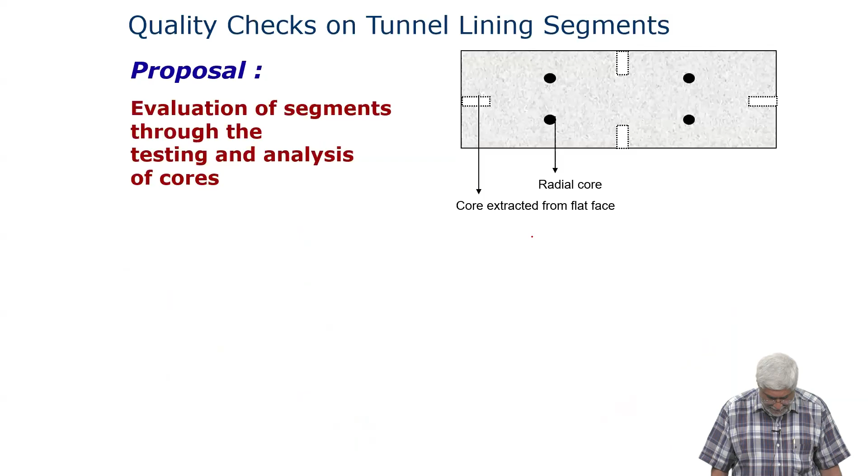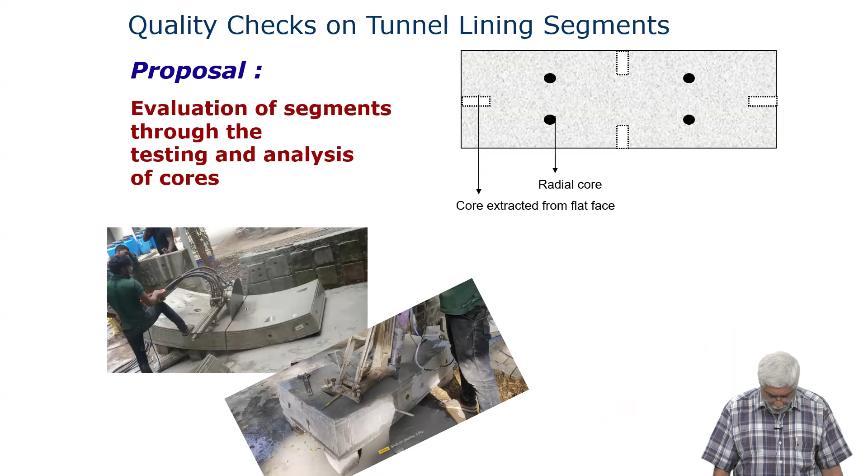So these are finite element analyses to see what are the high stress areas. Then we have to check quality as well. This is a proposal that was given for quality. We cut and see if the reinforcement and the fibers are uniformly distributed or not, and then check the strength.